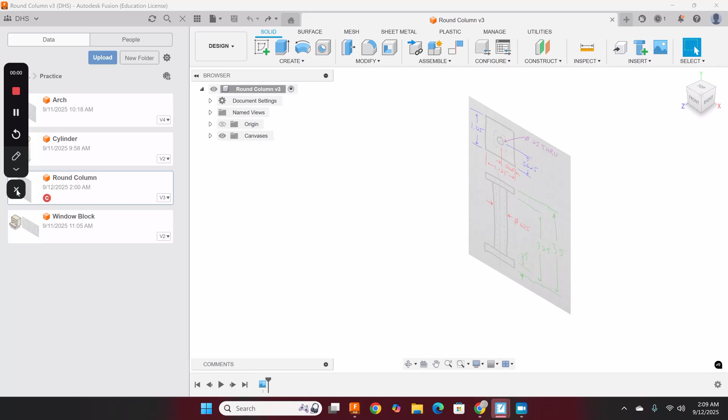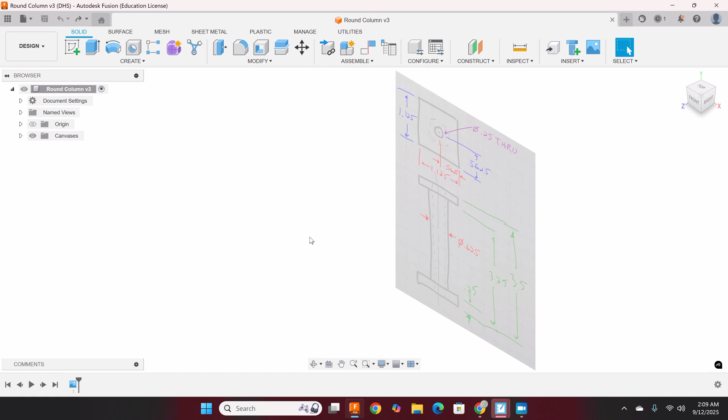Okay, at this point, I've already created and saved my file as round column. And I'm going to do this part a little bit differently to be more efficient and to demonstrate some additional features on Fusion. So I'm going to go ahead and minimize my data panel so I have more real estate to look at. And let's go ahead and start a sketch on the front plane.

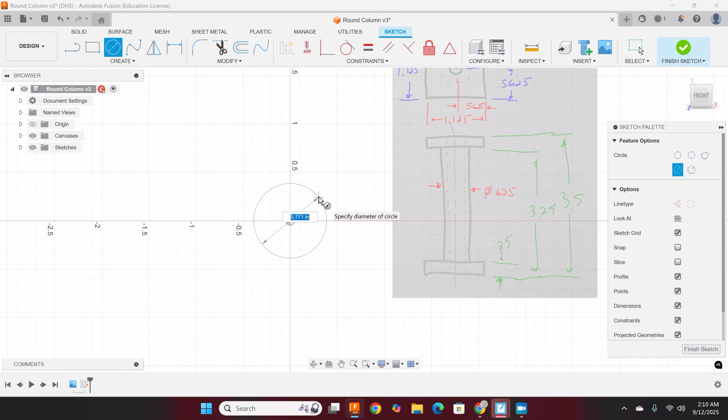Now, when I do that, you might look at this and say, hey, Mr. Conrad, this is sitting on a square base. And it is. Maybe I'd want to start drawing that. But in this case, I want to start with the cylinder in the middle, which has a diameter of 0.625 inches. So I'm going to draw a circle, 0.625, making sure I got the origin.

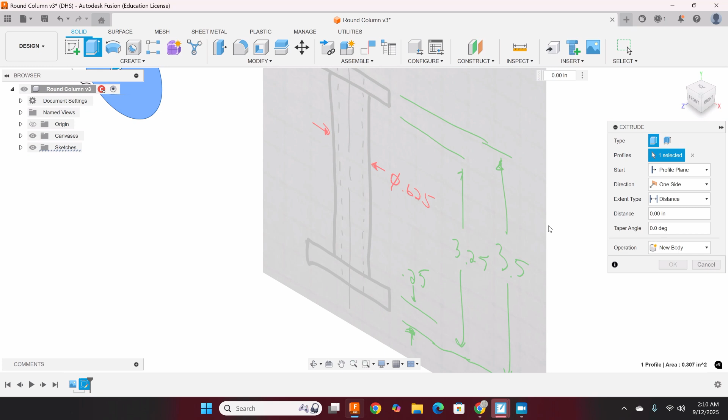I'm going to hit E to extrude, and most of the time it flips back to an isometric view when you do that. This time it did not. And if I look at this, I see that it has baseline dimensioning. The square base is 0.25, 3 1/4. So that math I can do in my head easily without having Fusion do the math. That's 3 inches. In this case, instead of going in one direction, I want to go symmetrically.

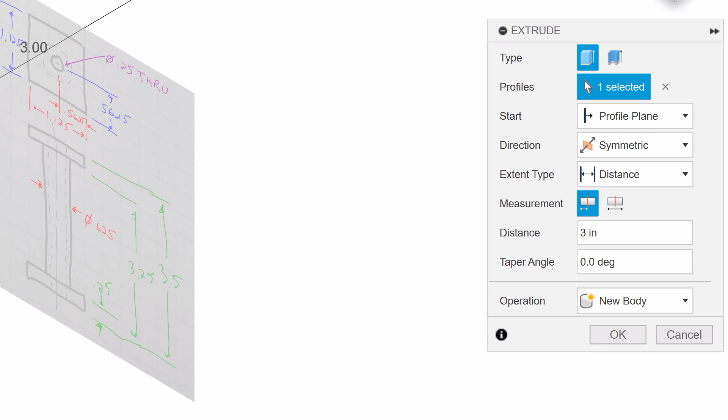And uh-oh, that looks a little long. That's because when I look at my dialog box, that is half of that instead of the full extent. So again, it's a Windows program. If you hover, it will tell you what's happening. So I want the whole length to be 3 inches. So I'll go ahead and select 3 inches. We are doing a new body. We say OK.

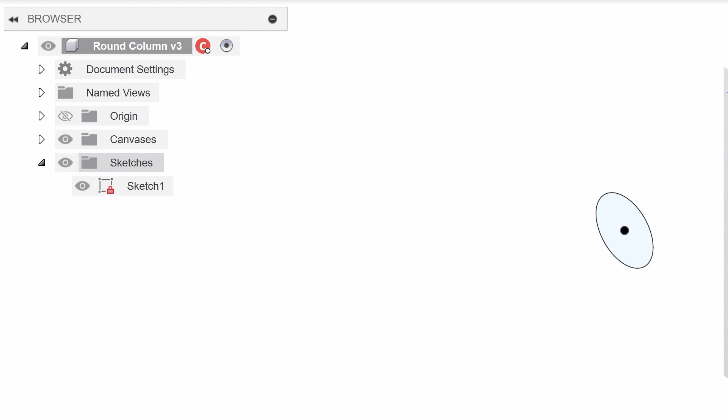And I lost it. Oh, you know why I lost it? That's because I was using my zoom key for a second there. When you go to do an extrusion, if something fails, and I think it did, it often hides a sketch. That's really easy to fix. If I go to the browser, expand the sketches, all I got to do is poke the eyeball to make things visible or not. So now my eyeball is visible.

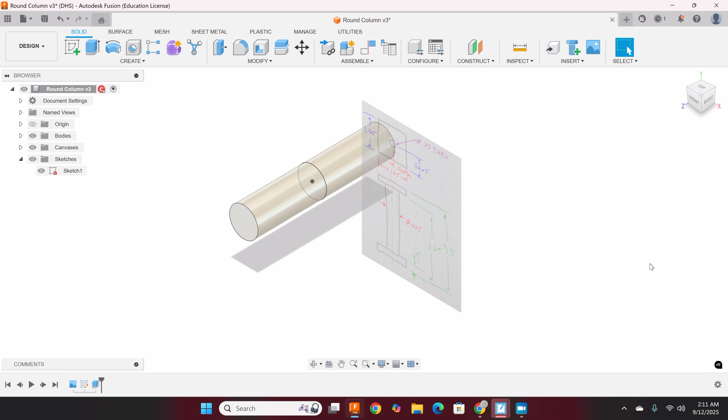Let's extrude 3 inches symmetrically. So I'm going to select symmetric, and I want the extent to be the whole length. Then I'll say OK. Now I can still see my sketch in the middle. If I want it to be hidden, I can poke the eyeball, and then my sketch is now hidden. Now, reason for doing that is we're only going to have to build one square when we build this part.

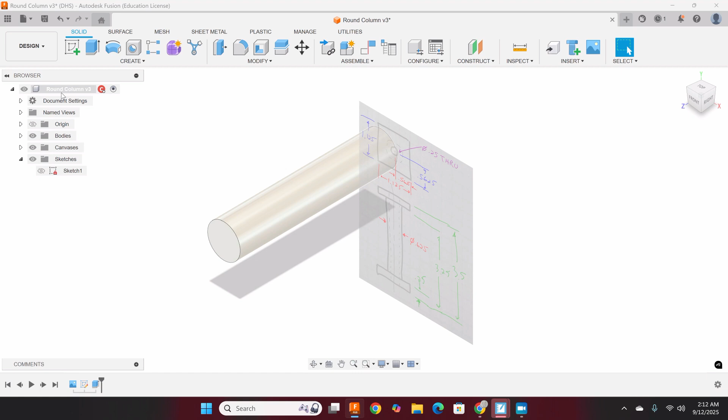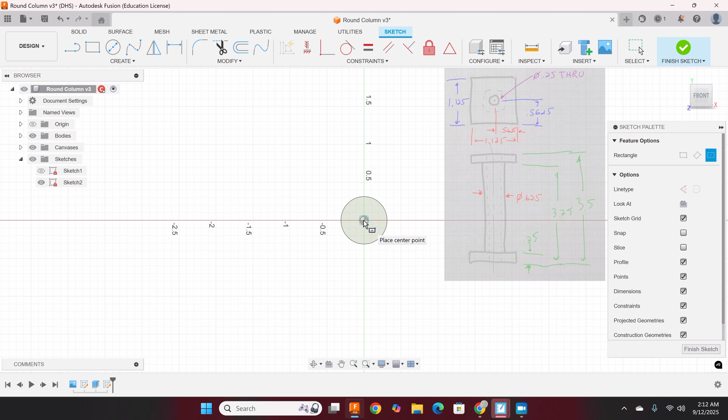So now I'm going to create a sketch, and instead of picking an origin plane, I'm going to pick the one that came right out at me. So go ahead and pick this end of the cylinder. Instead of doing a 2-point rectangle, under the Create menu, I'm going to hover and find a center rectangle. So when I come in and do the center, I want to make sure I get the origin, blue box around the origin, and the sides of the square base are 1.125 inches.

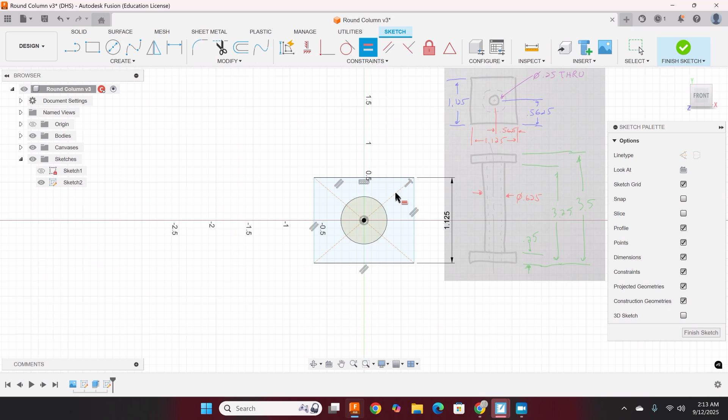Okay, another little feature we could do, big buttons are important. Rather than do numerical constraints for both sides, I know I want it to be a square, so I'm going to use an equals constraint that's going to force both sides to be equal to each other. So there's my 1.125 inches.

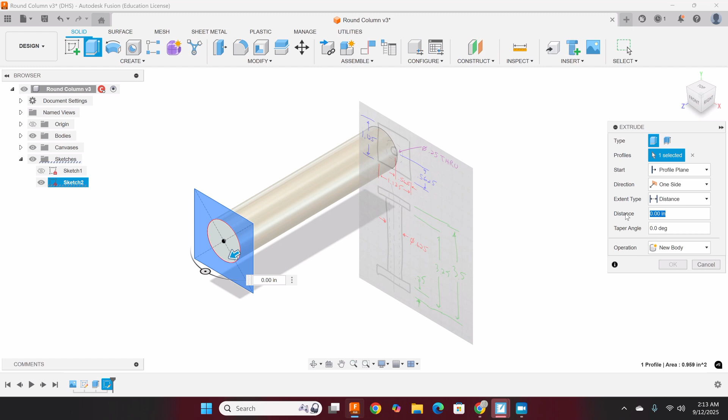Let's hit E to extrude. This time it did work. And let's go ahead and select all the profiles that are needed. So if you weren't paying attention, and you just keep moving on. Oh, that doesn't quite look right. There's a square base. It looks like a square base with the counterbore hole in the bottom.

So to change something, we're going to go to our design timeline or design history. And if I edit that feature, I want to make sure I get both of those profiles. The other thing is you want to make sure you're going in the correct direction. If we remember, we went 3.25 inches; we want this extra 1/4 inch to be not a new body, but we want to make sure that we are joining to the bottom of that cylinder.

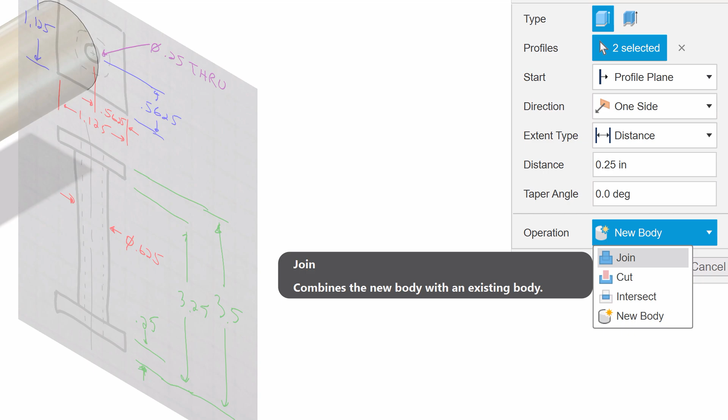In this case, the way we're drawing it, it looks like the front. So we want to make sure we're joining a distance of 1/4 inch, and we say okay. And because I was zooming again, it did some goofy things, so I'm going to have to repeat that process. So 0.25, boom, done. Poke the eyeball to hide the sketch.

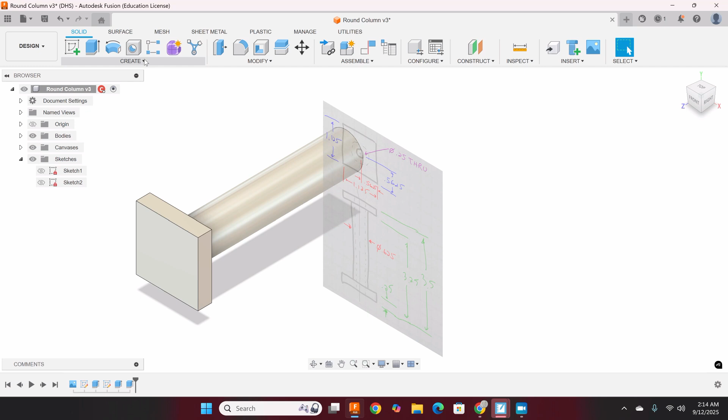Now, we could draw that twice, but it would be more efficient to mirror it. So what I'm going to do, additive modeling, I'm going to create a mirror. When I go to create the mirror, the active dialog box is blue. And right now I see it says objects bodies. We have one body in the browser. Okay. I don't want to do that body. I want to mirror the feature.

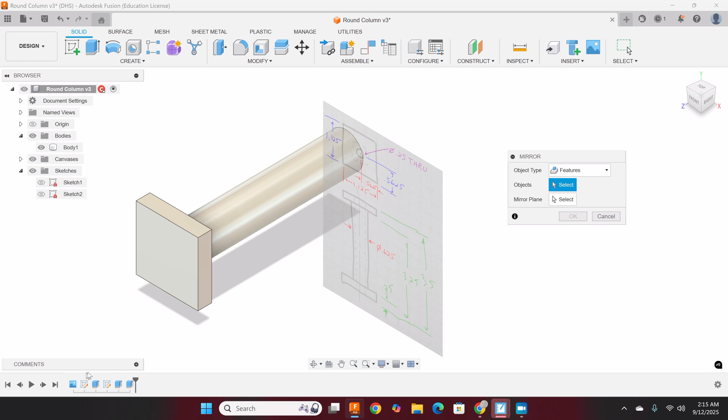And we have this option of bodies, faces, features, components. So there's always multiple options in every dialog box. I want to do features. Features are found in your design history or your timeline. And I want to select that last feature. And I can mirror a whole bunch of things at once. So right now I just have that one. We don't have a lot going on here.

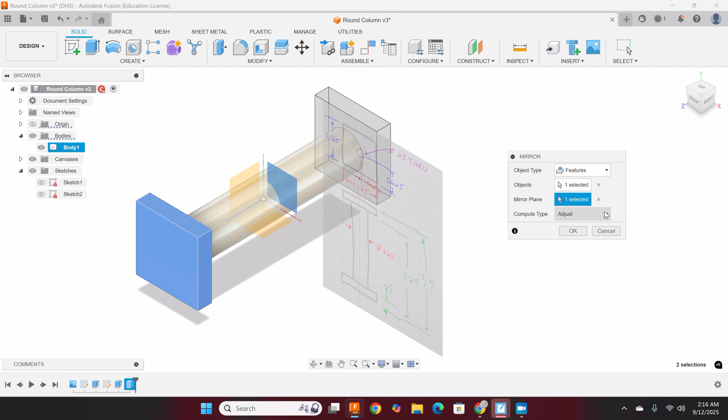For a mirror plane, and this is why I want to go symmetrically around the origin, I'm going to go ahead and select the front plane, that's the XY origin plane. So that kind of highlights up there. I select it. There's also other options here. That's not what I want. We'll just say okay. And there, we did not have to draw and reconstrain a square.

Now, in this case, it would be fine to draw another square. But if you had to do more complicated things in our sketch, we wouldn't want to recreate the geometry. I've made some changes. Save early, save often. Okay.

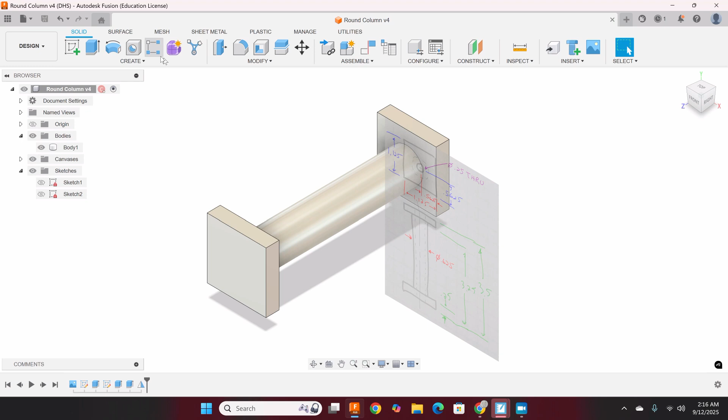Finally, if we look at this, we're supposed to have a hole that is a 1/4 inch hole all the way through. Okay. So I'm going to create a hole. And in this case, let's select the face and let's go ahead and look at it using the view cube and snap head on. That hole is supposed to be 1/4 inch all the way through.

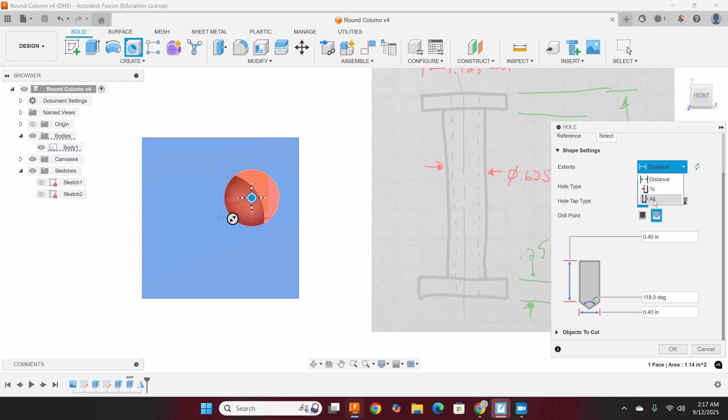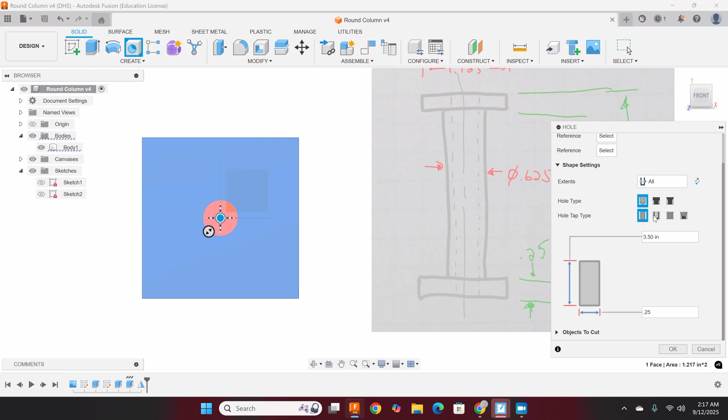So under distance, I'm going to select all, and the hole type, we have all these different hole types. We'll talk more about some of those other ones later. And I'm going to snap that to the origin, diameter 0.25. Okay, and we do want to go all the way through. We'll say okay. So now I have modeled the round column, and that was actually pretty simple to do, and we saw a couple new features.